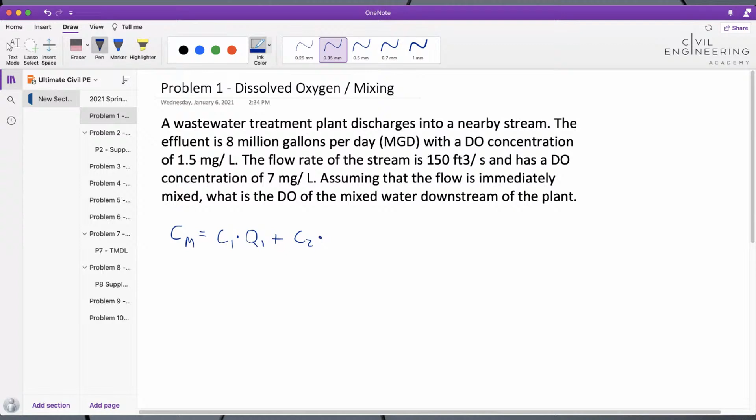And what we're going to use for that is this mixing equation. I thought I had it written up there. I'll just rewrite it. We have a basic mixing equation, and another way to think about it is a weighted average. So the equation is going to be Cm, or C mixed, is going to be the concentration 1 times flow 1 plus concentration 2 times flow 2, and then divided by the sum of the two flow rates, Q1 and Q2.

Okay, so we have some given information in the problem statement here that we can use. This is effectively Q1, we'll call it, the 8 million gallons per day. We'll need to convert that. And then this is going to be the C1, the concentration 1, which is the DO, the dissolved oxygen. And so what's happening in this problem is we have the wastewater treatment plant discharging water into the stream, and we have a final dissolved oxygen concentration that we need to determine.

Okay, and this goes right into the water quality aspects that we're getting at. So this is mostly related to the mixing equation, but it's a part of computing these type of problems. And so that's Q1 C1, and then we have Q2 C2. And so let's plug those in. Well, first of all, we need to go ahead and convert Q1 over to CFS so that they're matching units. So let's go ahead and do that.

Q1 is going to be 8 million gallons per day. I'm going to say 8 times 10 to the 6 gallons per day. And then, of course, we know there's 86,400 seconds in a day.

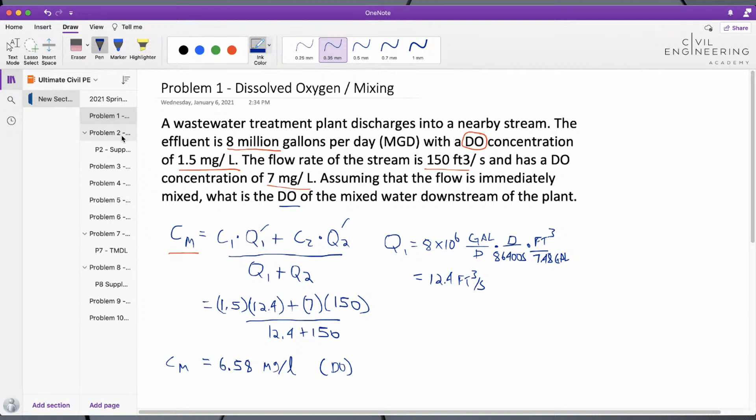That being said, oxygen is obviously a big part of the water quality aspect. And so what we want to make sure of is that the water has sufficient oxygen to sustain fish life. And this would be right on the borderline. About 4 to 6 milligrams per liter minimum would be what you would want. So we're right at that borderline, but that is where fish life and other aquatic life is needed to have adequate oxygen.

Okay, so that's problem 1. Let's jump on to problem 2. And if we have questions, I'm sure, Isaac, you'll let me know.

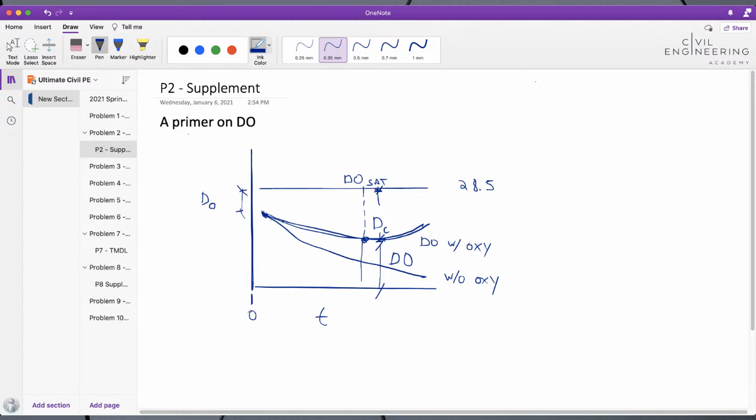The KD and KR are 0.3 days^-1 and 0.5 days^-1, respectively. And those are characteristic values of the water. When we go back to the previous drawing, the KD is the decline rate of this curve. You can almost think of it as the slope, and the KR is the increase rate or the oxygenation rate. KR means reoxygenation rate. KD means the deoxygenation rate.

So BODU, that's the ultimate BOD. We talked about BOD just a few minutes ago. And then the dissolved oxygen mixed in the stream is 7.5 milligrams per liter. So we want to find that D sub zero, okay, that initial deficit.

So I'll just draw a thumbnail sketch of that graph so we can be thinking about that. So we'll have some DO sat here, for the dissolved oxygen when it's perfectly aerated, right? And then we're going to have some initial deficit. It's going to have a smile there. And what we need to do is determine what this D sub zero is.

Now, there will be a DO at this initial point, okay? So if you look at this, it's a pretty simple equation. We're looking for this D0, right?

And so we have the dissolved oxygen in this stream. So we have that. We can go look up the DO sat, and then we just determine D sub zero from that. All right. So another way to say it mathematically, it would be D sub zero equals DO saturated minus the mixed DO.

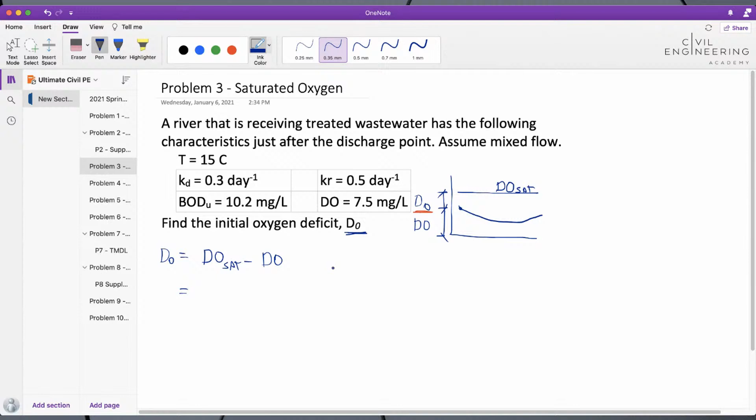All right, so let's go look up DO saturated, and I'm going to be using Appendix 22D of the Civil Engineering Reference Manual. If you're following along on that, one aspect of it is it's going to be a function of temperature. So DO sat is a function of temperature. It's also a function of the chloride levels.

Now, I'm going to assume chloride. We had to make assumptions sometimes on the exam, right? So I'm going to assume that the chloride levels are 0. We have the temperature, so we can then determine that the dissolved oxygen is going to be 10.07 from that appendix, milligrams per liter being the units.

So now we just plug that in, 10.07, and we subtract off the DO of 7.5, both being in milligrams per liter. The value there is going to be 2.57 milligrams per liter.

All right. Any questions so far? I'm checking. We haven't had any questions about DO, BOD, anything. All right, very good. I am listing the figures and appendix you're listing for people if they are following along. I know you're not writing that on the screen, but in the chat room, I am trying to follow along with you. Okay, yeah, and I can write those out if that helps.

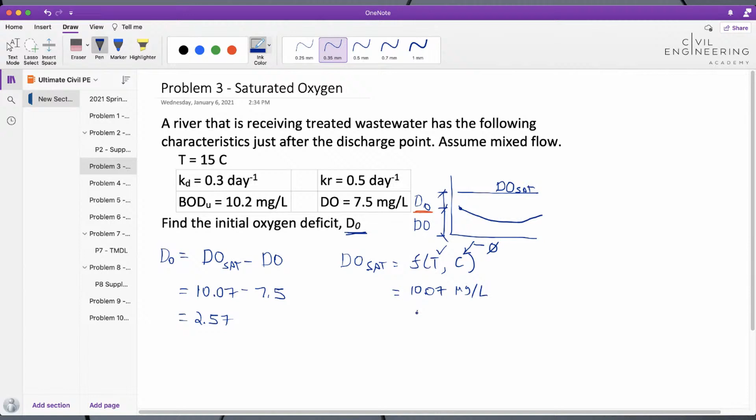All right, so let's go ahead and jump to another one. This one is going to be a little more math, so for those of you that like math, we're all engineers, so hopefully, right? So problem 4, distance to DO min. It says, a river that is receiving treated wastewater has the following characteristics just after the discharge point. Assume mixed flow. So we have basically the same data, if you're noticing a trend here. I'm just adding on a little bit of data, and this is actually the value we just determined. The only other aspect that was added was the velocity of the stream is 0.8 feet per second.

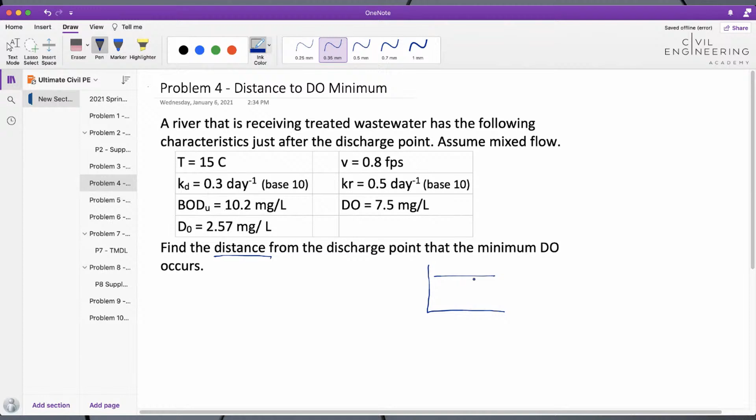So this is a problem where we're going to need to determine two things. Number one, it says distance from the discharge point. Well, we know that we have that graph. Here's a thumbnail, that same graph we've been talking about with the smiley face, and at some time t sub c is when it's at its lowest, right? So minimum DO is at that critical time t sub c. Not time of concentration, t sub c is what it's called, critical time.

And so the distance is going to be just distance equals rate times time, right? Or distance equals velocity times t. And that time is going to be t sub c. So we need to find t sub c first, all right?

So in the CERM, that equation, some people refer to it as the Streeter-Phelps equation, is in chapter 28 of the Civil Engineering Reference Manual, and that is equation 28.38, if you're using that book. Other references would include Metcalf and Eddy, or others. The wastewater books, environmental type books would have that in there as well.

So the formula for that is going to be t sub c is equal to 1 over KR minus KD, times the log. And it does say base 10 for these. Keep an eye out for that. I noticed one of the 6-minute solution problems actually had this in a natural log, base e. They just switched that out for a log base e. So I did notice that, but I kept this one to base 10. So the KD again, and then here's our BODU, that ultimate BOD. And I'm going to run out of space here, so I'm going to move that.

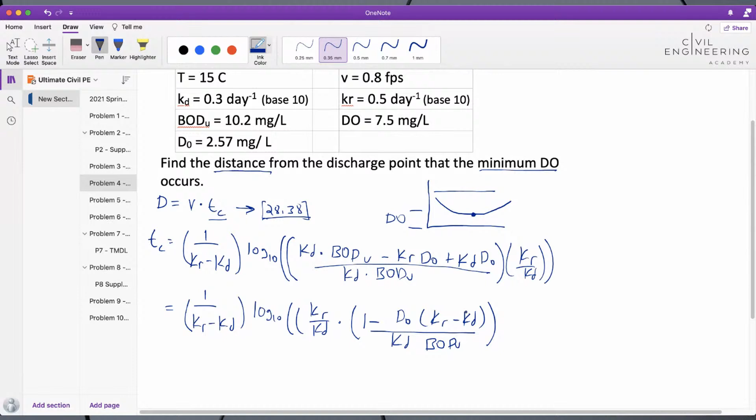And then again, log base 10. KR over KD. It's a little easier to work with. That looks a lot easier to work with. And then KD. I think I got enough parentheses there. Let's see, one more. Okay.

So we have all of the information that we need here, and I know the KR and KD are above here, but we just need to plug and chug. We have basically everything we need for the TC. And so we're going to plug those values in. So 1 over the KR was 0.5, and that's days to the -1. Again, I'm not going to write those out, but it is days to the -1, which 1 over days to the -1 is going to give us days.

And then the log portion of it is going to be canceling out all the units. So KR over KD is going to cancel out those units, 0.5 over 0.3 there. And then 1 minus the D sub 0, the deficit. Now, we were given that information, which happens to be the same value that we computed on the previous problem, but you can see that this could be a situation where you built up to that D naught and had to determine that in the same problem.

And that 1 should be separated from that. So let's clean that up a little bit. In other words, 1 minus the ratio there. And then 0.3 times 10.2. All right, so the D0 times KR minus KD is a ratio over KD times BODU. And you're going to subtract that from 1, multiply it by this ratio, and then take the log of that.

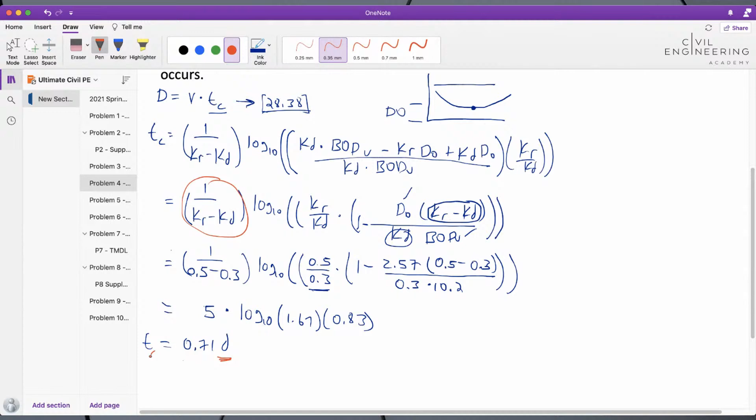And remember, all of that was to determine the distance. So distance equals velocity times time. So we need to extend this out and finish this out. So distance, I'm going to write out distance because we got all these D's. Distance equals velocity times time, in this case T sub C. The velocity was given in the problem statement, if you recall, 0.8 feet per second. I am going to write out the units this time because we got to do some units conversions.

I generally recommend writing all your units out if you can. I've already confirmed all of these and I feel confident with it. If I have any question at all, I'm going to write them out. And I would recommend trying to write them out on just about every problem, because I would say the killer there is units, as you all know, I'm sure. So don't get stuck with the units. I guess that's where people think the exam can be tricky if they don't watch those. So make sure you watch those, look at what you're given, and compare that to the answers as well.

And actually, units can be a way to solve a problem sometimes, because you can sort of work your way through that. But yeah, so we have feet per second. We know we need to get that.

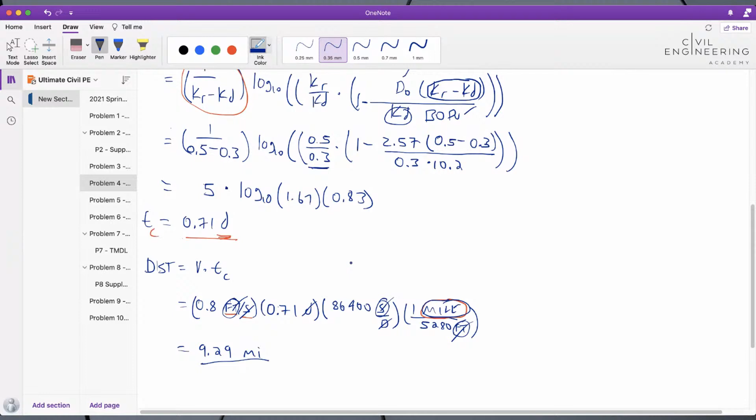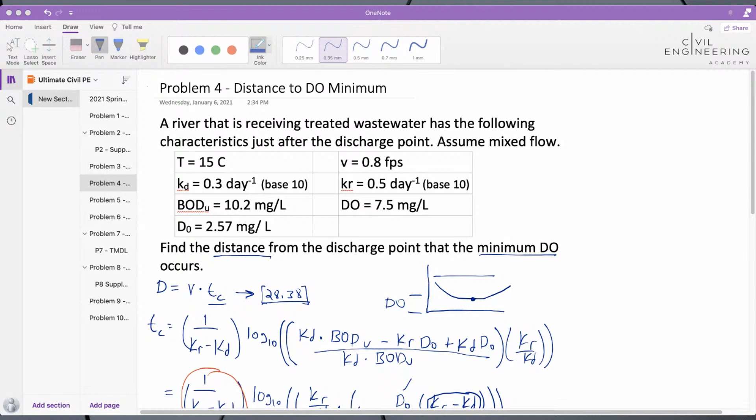But I did want to, my levity moment for the day is going to be, I wanted to show everybody my t-shirt, just for fun. But hold on, let me get you on here. Oh, you don't have it? Okay. So let me get you on here. There you go. All right, hey everybody, I got my t-shirt here and it says, I'm a 3 sig fig kind of guy. So just for fun, this was a triathlon I did a few years ago,

and this was the t-shirt we wore. As I was thinking about civil engineering and the PE exam this morning, I wanted to share that with everybody because I was doing a problem last night. A lot of people get on to me about that. I usually stick to 3 sig figs in my problems, and if I don't, you can get on to me about that. I usually don't carry it out much more than that. So I don't know how many sig figs you like, but I like 3. So maybe like the 5280 is sig fig. But just a fun moment.

Was that the team name, Andy? It was just we came up with a t-shirt for our company. A couple people up here in the office building that I work in, it was like 4 or 5 of us, and we all ran in that t-shirt. Nice. I like that.

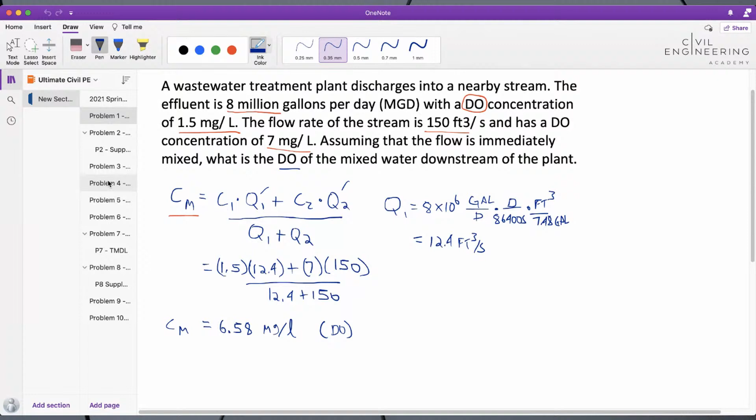So this is awesome. There is a comment here from Kevin: thanks for the stream, it's helpful to see more depth. I'm guessing most of these are more depth related questions. Yes, I would say so, Kevin. Yeah, definitely. I don't know that you're going to see a lot of this on the morning part of the exam, but there's some benefit to this. You can even see a simple thing like this mixing equation. That's just a weighted average type equation. Some of the tips we've given. So hopefully you can benefit from this, even if you're not taking the water resources depth, but the water resources depth is the focus today.

Yeah, a problem like that, number 1 or 2, does creep up occasionally on a breadth exam. You might not see a huge volume of questions like that, but they can creep up on there. Mm-hmm. And like you said, a lot of times if you can work out the units, you can work out some of these kinds of problems. But it is good to know. Yeah.

Okay, so let's keep going. Problem 5, more on oxygen. We're going to continue this theme for a couple more problems, actually. We got the same data as before, again. No new information, looks like. So same river, same data, and it says find the critical oxygen deficit D sub C. So again, that same

graph. The graph doesn't apply as much anymore on this particular problem, but just so we know what we're looking at, I'll draw it once again. And it's that point. Remember that dimension from DO sat to the bottom of the curve is our D sub C. It's the deficit, the difference between the min and the max, basically, the saturated level. So there's an equation for that one. I believe it's 28.38 in the book. And so that equation is going to be D sub C.

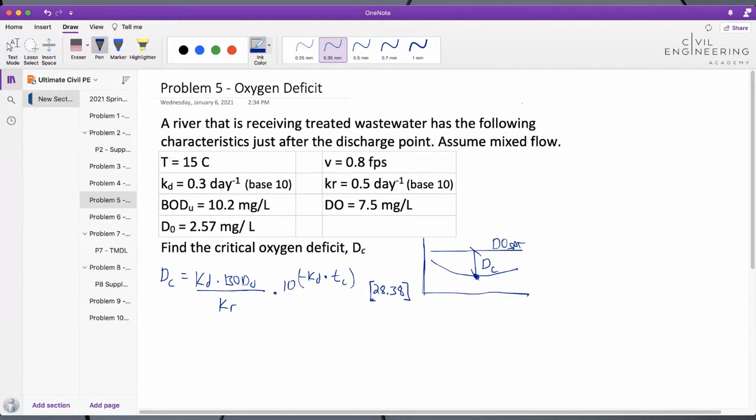Okay, so this is just a plug and chug type problem. And again, 28.38 was the equation number in the CERM. So KD, KR, we have those. We have BODU in the problem statement, and we have, again, KD again, and then TC. We don't have, but we just computed that, right? So we could go to the previous problem and 0.71 days. So we now have that information.

All right. So you can see that this could be a 2-part problem, but I set it up as a 1-part problem here. So we have the T sub C from the previous problem. We're going to plug everything in. So KD 0.3, again, days to the negative 1. BODU is 10.2 milligrams per liter. KR is 0.5. Negative KD, so 0.3. And TC, again, was 0.71 days.

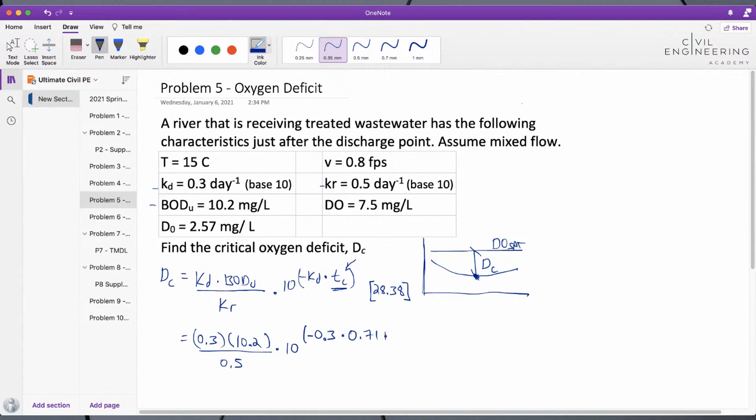Now, one thing about the PE exam, if you didn't know this, this is actually not going to happen on the PE. It's not going to be a problem where one problem is going to rely on the next. Now, they may have a setup like this, and you'll have all the same data, but it would not require a building on of 2 or 3 problems, if that makes sense. So you won't have a second problem wrong because you got, for example, TC wrong on the previous problem. So that is one good thing about the PE. So I just broke it down into 2 parts just to help me with my math checking.

0.61, and then that was 3.7 milligrams per liter. But let's go back and look at our units. Again, I would write it out if you can, just for neatness and time's sake. I did not do that here, but we can just walk our way through that. So KD, KR both have the same units, which means that unit cancels out, days to the negative 1. BODU is milligrams per liter, which leaves us with that. Over here, the KD is in days to the negative 1, and this is in days, so those cancel out. So we're left with milligrams per liter. So the quantity is 3.7. The units are milligrams per liter.

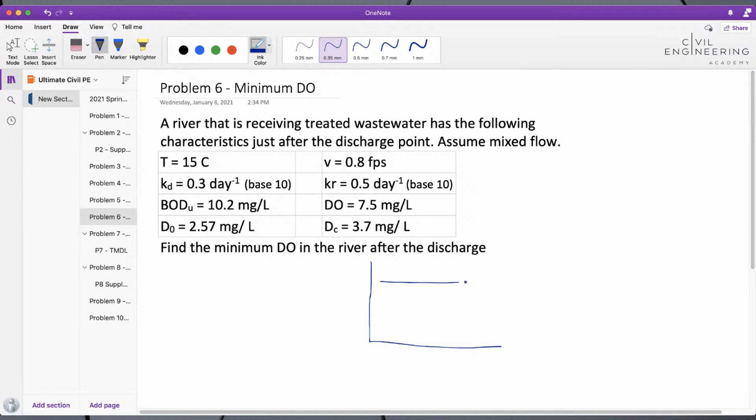So that being said, our same diagram. Hopefully you're not getting too bored of this diagram, but hopefully you are learning a lot about DO and this graph, because you can tell it's important. So we have that same value, the DC, the deficit, and then the DO at that critical point, which is what we're looking for here, the minimum DO in the river after the discharge. So once we computed that deficit value, then we know the DSAT, right?

We can go back and look that up again, and we can say that in this case, DO is going to be DSAT minus DC, right? So we can write that out and say the DO is going to be DSAT minus the D sub C. Again, we looked up the DSAT earlier, and we had that as 10.07, based on 15 degrees Celsius, and then secondly, the assumption of 0 chlorides. We had to make some assumption. So 10.07 milligrams per liter.

I will write it out this time. It's only two items to write out. And then the DC that we are given, and of course we could compute it if it wasn't given based on the previous problem. But we do have that as 3.7 milligrams per liter. And doing the math there, 6.37 milligrams per liter. So you think about this problem, very simple math, right? Very simple problem. But we just have a lot of data, right?

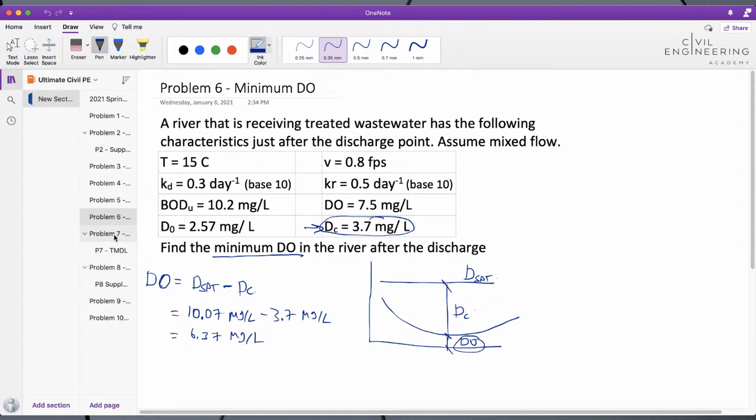So thinking back to our original slide, one was, what is TMDL? So I didn't come up with a multiple choice, but I just asked a question, what is it? Just take a moment to think about that. Does anybody know what TMDL is? We'll give the audience a minute to answer that one. Start thinking, put on your morning thinking caps. Any answers? All right, wake up, everybody. Here we go. They're coming in. Total maximum daily load, yes. So Robbie says, yeah.

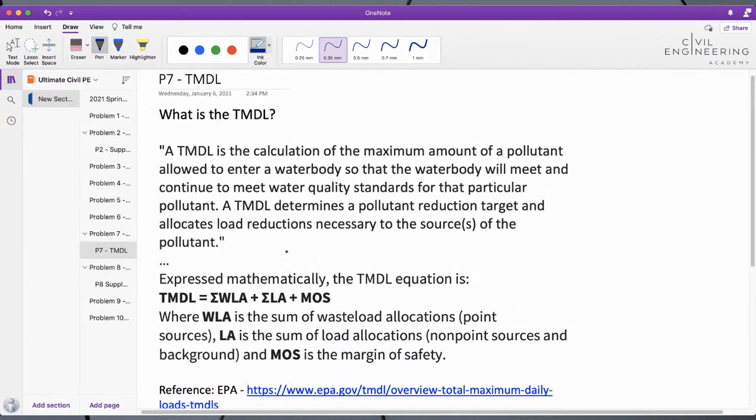Here's a bit of supplemental information. This just comes off EPA's website. And the TMDL is also related to this concept of oxygenation. With the Clean Water Act in about the 70s, we were seeing a lot of discharge from different pollutant sources, whether it be a waste treatment plant or chemical plant. It was dumping water into rivers and other bodies of water, and it was creating unhealthy situations. And so the TMDL is a maximum amount of pollutant allowed to enter a water body, so it will meet water quality standards for a particular pollutant.

So that pollutant might be nitrogen or phosphorus, which you say, well, those don't sound bad. We have nitrogen in our air, we have phosphorus in our water naturally occurring, but too much of those things can create a real problem that would then cause algal blooms potentially, which would then decrease the oxygen. Obviously, other contaminants would be a problem as well.

So it may be just dangerous inherently. So the original slide talked about biological contaminants and chemical contaminants. Phosphorus and nitrogen would be chemicals that would have a biological aspect to them, meaning they create these algal blooms, right? Whereas a PCB, polychlorinated biphenyl, would be a chemical contaminant, of course, that could create really big problems for fish. And then if you eat that fish, it could be

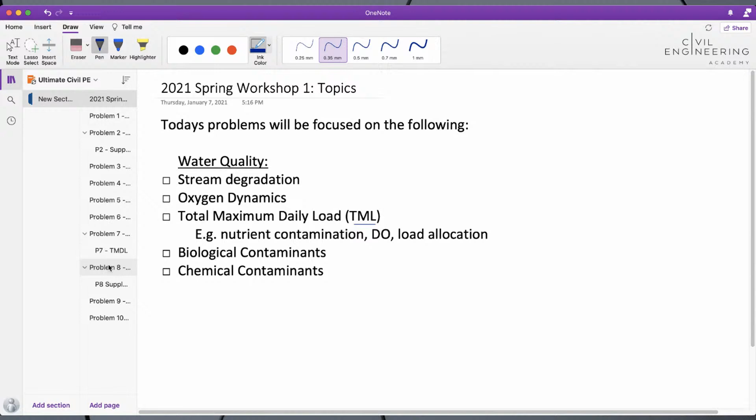But biological contaminants, chemical contaminants, TMDL. Obviously, didn't put the thing there correctly. But we've hit a lot of these today. We've got a couple more minutes. Do we want to keep going and try to hit one more problem? Yeah, Isaac? If you want to knock it out here, it looks like you got, I don't know, 3 more. Yeah, let's see what we can get.

So, Andy, is there a good way to test that fish for PCBs? Because I don't want to be eating some bass and some salmon that's got that in there. Yeah, I mean, you would have to go over to your local EPA, I suppose, and see if it's maybe published on the local water quality website. I was actually doing a little YouTubing this morning, and one interesting thing I found out was certain bodies of water that have problems have to publish that onto a form, which I guess is published with one of the government organizations. So I imagine that you can go look that up.

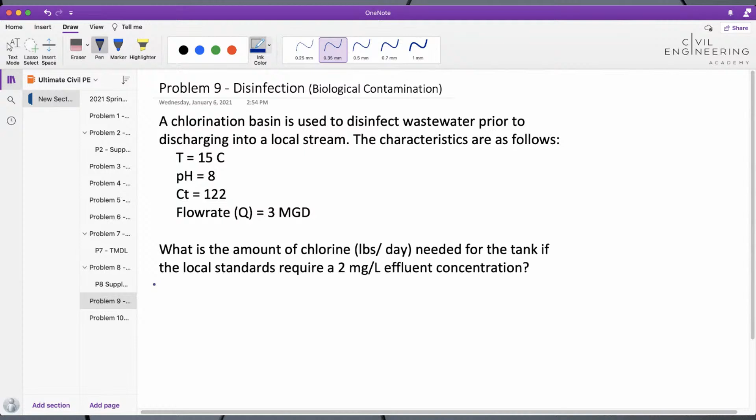And on the exam, it's not like they're looking at this list that we have at the beginning and necessarily following it to a T. It's more like a guide. So be careful of that. If you're like, oh, that wasn't on the list, everything's fair game, so be ready for anything, right, Isaac? Yep. You'll be taken off guard maybe with a few that you're like, what?

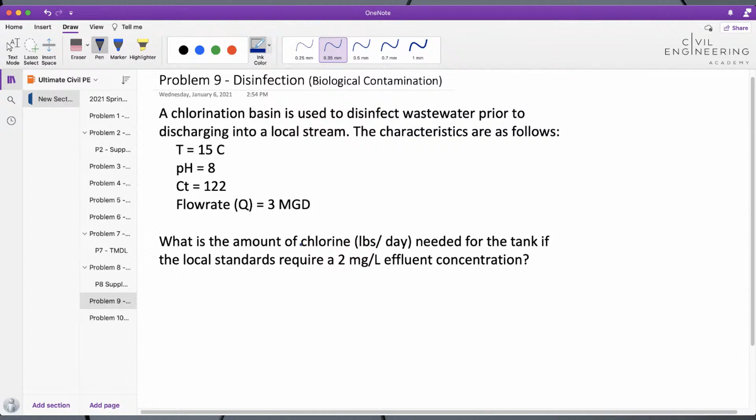So what we see here is a chlorination basin is used to disinfect wastewater prior to discharging into a local stream. The characteristics are temperature, 15 degrees, pH 8, CT value is 122, a flow rate of 3 mgd. What is the amount of chlorine in pounds per day needed if the local standards require 2 milligrams per liter effluent concentration?

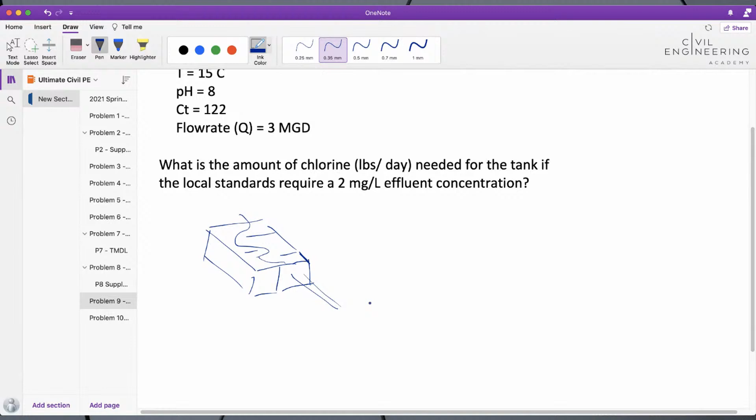So a chlorination basin would have some baffles in it. It would go along the baffles in order to create, not always, but a lot of times you'll see what we call plug flow, which is what I'm showing here. So anyway, it would go around those baffles and it would come out of there. So we have a flow rate given of 3 mgd. We have a CT of 122, and we have other data there.

So first thing we want to determine, it's asking for how much chlorine in pounds per day do we need. And that will be the concentration, C naught. So on the beginning side, we'll have a C naught, and then we'll have a CF. Well, they gave us the CF, and this is probably the trick to this one, if you want to call it that. They gave us the CF of 2 milligrams per liter. We need to know what the C naught is, the initial, and the pounds required per day is going to be

equal to the quantity of chlorine, QC, which is actually going to be, interestingly, Q times C naught. That's just a coincidence more than anything. So our Q is 3 mgd, 3 times 10 to the 6 gallons per day, and then that's going to be multiplied times the initial concentration, which, now I pulled this out of a different book. There's not a whole lot that you'll find in the Civil Engineering Reference Manual on that. So if you have this book, you can use it, or you can just write it down here.

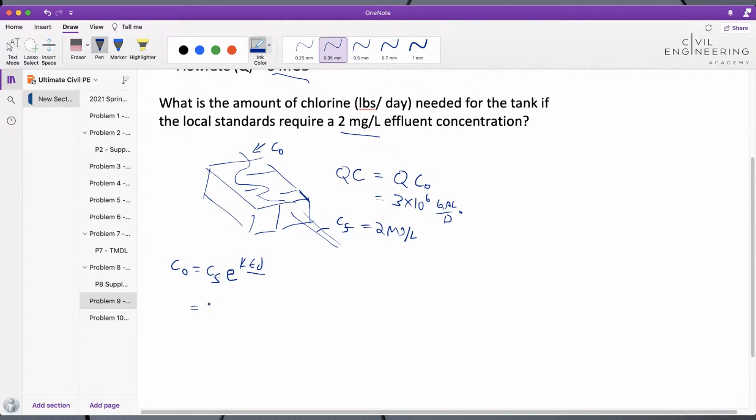But the C naught is equal to C final times e to the K TD. So TD is the detention time, which we need as well in order to solve for this C naught. So the CF we have, the K is a function of the water. I did not give that to you, so we would need to give that to you actually. It's going to be 0.25. It's a function of the wastewater.

So the K would be 0.25, and then the TD you would need to determine. So I'm going to leave a space for that because we need to compute that. That is going to be a function of this CT value. CT is a value that's found from testing of that wastewater, much like the K value. So that would be given for us.

And so the time is going to be the CT over C. So you can see the C's kind of cancel, and you're left with the time. So we know the CT value of 122. We know the concentration, the final concentration is what we're going to use there, is 2 milligrams per liter, which is going to leave us with 61, and that's in minutes. So they would need to give that to us as well. So 61 minutes. We'd plug that in here, and then I get a C naught of 2.58 milligrams per liter.

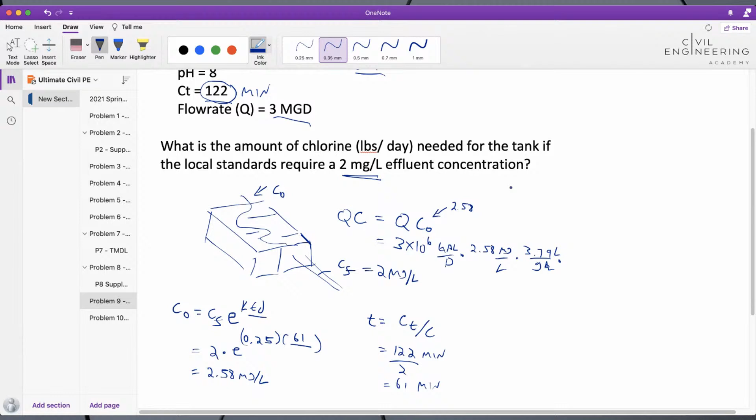Then we plug that in here. We get our units, 3 times 10 to the 6 gallons per day, much like the one we did before. I'm going to say 2.58 milligrams per liter. We're going to multiply by a few factors. So 3.79 liters per gallon, and then 454 times 10 to the third milligrams per pound.

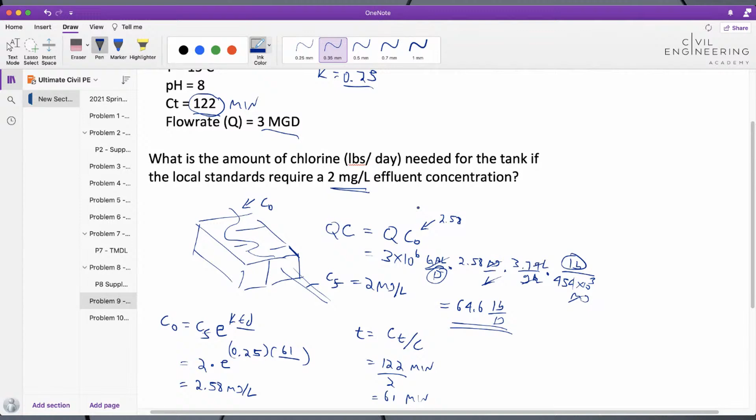And then we cancel out the appropriate ones: liters, milligrams, actually day doesn't get canceled. So that leaves us with pounds and day, so that'll be pounds per day. And then I get a value of 64.6, which is the amount of chlorine used. Perfect. So that one I worked a little bit faster, just for time's sake.

And then the final one just says which pathogen is used for evaluation of disinfection and inactivation. So if you want a 90%, 99.9%, we heard a lot about that this year with the virus. But if you want a 99.9%, disinfection inactivation is usually based on which one? A, Salmonella, B, E. coli, C, cholera, or D, Giardia lamblia.

There's a question real quick from Kelly about which book you were referencing for problem 9. Yeah, I used a book by Ronald Droste, that was the reference I used, and it's a wastewater book. And that equation was 10.4 F. How do you spell his name? Ronald Droste. Okay, you got it. I put it in the comments.

All right, and then the answer to that last one is Giardia.